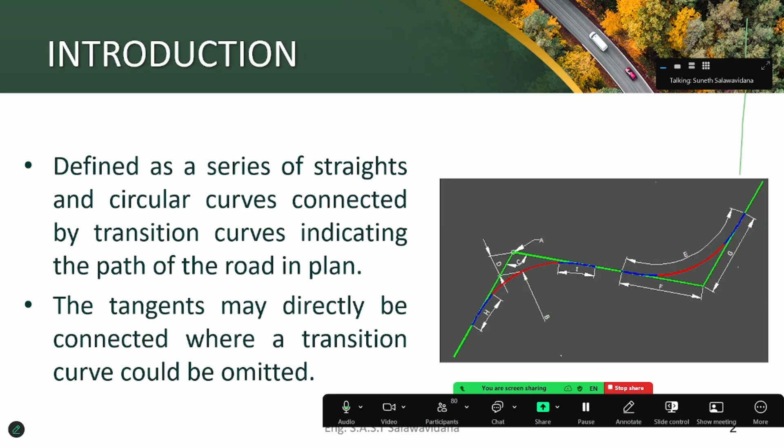But these are only necessary for high speed environments like expressways. For national roads, we don't use the spirals. So the tangents may directly be connected where a transition curve could be omitted, right?

Now when we are going to do a horizontal design, what are our major considerations? Number one is safety. Profile means a vertical alignment. How you are going to do that vertically.

Type of facility - that means the same design standards that you use for a national highway, you are not going to use for a rural road. And the design concept that you use for a 4-lane road, you are not going to use for 2-lane roads. Then the design speed, that is the most important one.

What is the design speed of Sri Lankan national roads? There are two design speeds. What are they? One is 50, the other is 70. 50 is for urban areas and 70 is for rural areas.

How do you know what is urban and what is rural? Just looking at a place and seeing this is an urban landscape - so this is urban, I have to go by 50 kmph. And then you travel and see paddy fields and things, and say okay this is a rural area, I'll go by 70. No, that is not the way.

Now usually the urban areas in this country are gazetted, and you have to refer to the gazette to check what is a rural area and what is an urban area, right? But when you are driving, you don't take the gazette with you. Therefore it is the responsibility of the road agency to put the speed limit. They have to put a signboard saying this is the speed here, either 50 or 70.

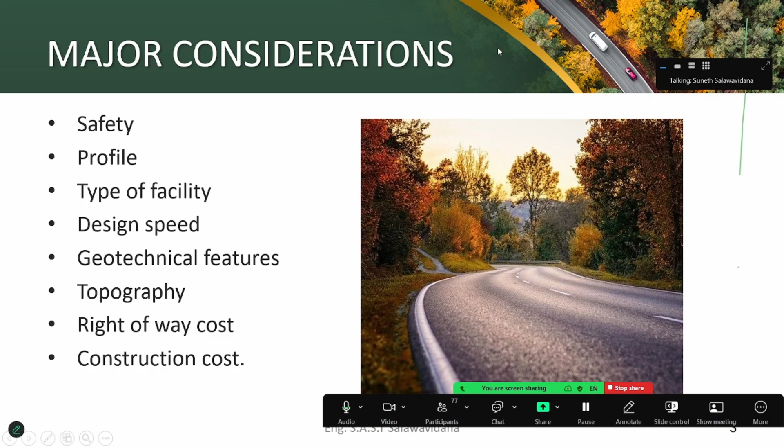So then we have to go into curve design, right? Curve design - I will tell you this one because it's very important, right?

You have to consider some theory stuff here. Maybe in university you studied movement of a vehicle along a circular path. When you are traveling along a curve, what will happen?

You understand that there is an outward force called centrifugal force. If you don't understand this, think back to childhood, when technology hadn't taken over. In our childhood we didn't have the internet, so we had our own games. One game was taking a ball, tying a string around it, holding the other end, and rotating it around your head.

Once you rotate this ball around your head, what happens? The ball is trying to go away from you. That is just because of the centrifugal force. Then why doesn't the ball go away? Because there is a string and there is tension, so there is an equilibrium of forces. Therefore the ball does not fly away.

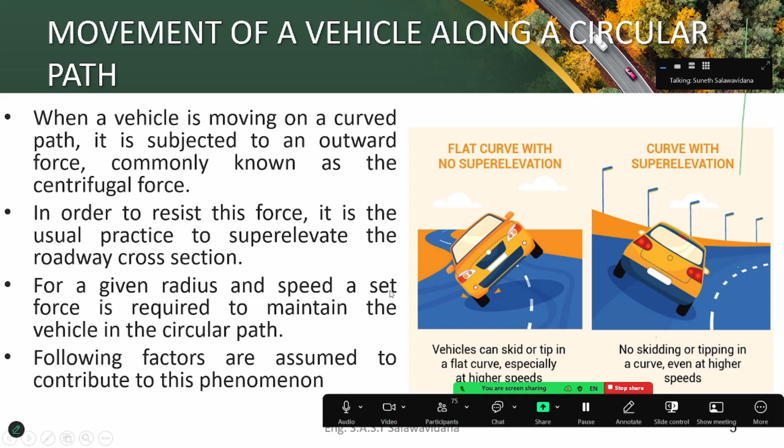So what are the factors? With this, we can prove an equation: R is radius, V is speed, E is the super elevation as a percentage, and F is the friction factor. F equals mu r, where mu is the friction factor, but here we use it as F.

With this equation, you can prove it using general physics - in my book I have proven this. So with this, you know what should be the minimum radius that has to be provided for a given speed and a given super elevation. Friction is usually the same; it can change depending on speed, but for a given speed the friction factor is the same. Therefore you can find the radius.

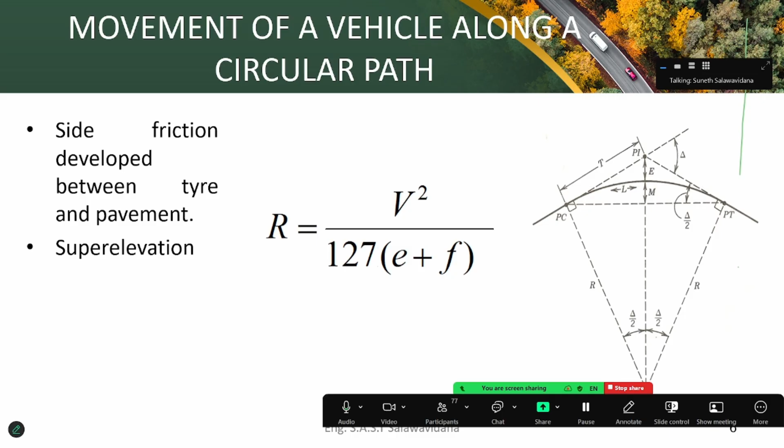Now you know how to get the radius for a particular design speed based on the super elevation. Super elevation is usually given as 2.5%, 3%, 4%, 5%, 6%, and so on. So if somebody asks, say the design speed is 50 kmph and the allowable super elevation is 3%, what should be the minimum radius to provide? That's an exam question if you are following highway design. You can find it using this equation.

The side friction factor, F equals mu r, where mu is the side friction factor, depends on vehicle speed, type and condition of the road surface, and type and condition of the tires. So once I say type and condition of tires, you might wonder how we find the friction factors, since tires differ from one vehicle to another.

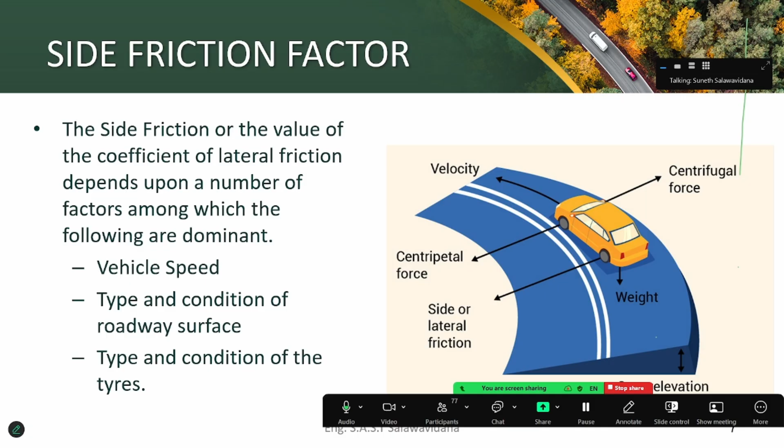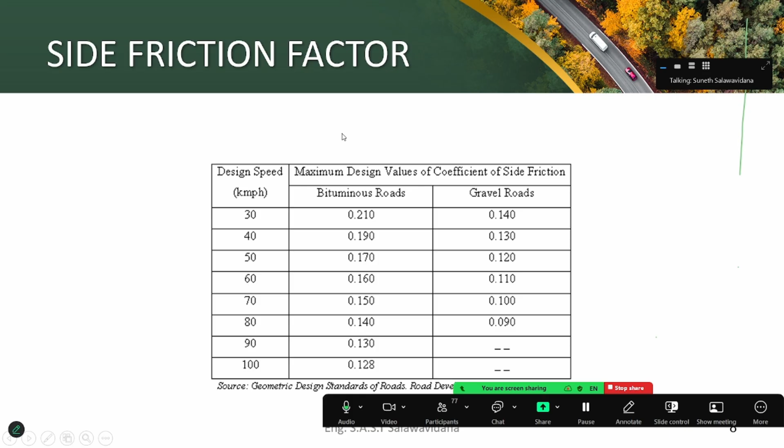But there are usually some standards for tires. With these particular standards, through research we can find what the friction factor should be. So these are the friction factors that we have calculated using those equations.

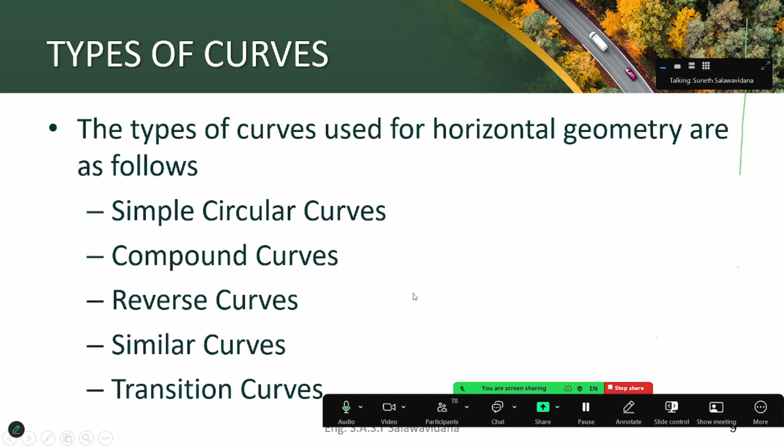Then we will go into the types of curves used in highways. There are a few: simple circular curves, compound curves, reverse curves, similar curves, and transition curves.

What are the general considerations of horizontal alignment? Alignment should be maintained as directional as feasible. What is this? Just think that it is the year 1815.

Just the time the British conquered us. Now they ask you to build a road to Kandy from Colombo. How do you do it?

You start from Colombo, go to Galle, then come to Ratnapura, then go to say Ampara, then come back to Polonnaruwa, and then come back to Kandy. Is that the way? No, you should try to have a road from Colombo to Kandy in a directional way. That means you always have to keep in mind that I am going in this direction. You can have some curves, and sometimes you'll have to come back and go, but still it should be directional.

Then you have to consider the topography. If there is a big mountain, what are you going to do? You go and cut it down. But if there is another way to go, don't do that, right? Or else what you do is put a tunnel.

Now in the Ruwanpura Expressway, we are going to have a tunnel. Earlier we tried to cut the mountain, but geologists from University of Peradeniya came and did some research, and they said you can't cut the mountains because they are very fragile. If you cut it, there will be earth slips. So then we proposed a tunnel. But why did we propose the tunnel? Because it was an expressway, so you can't go in a zigzag manner - you have to be very directional. Therefore we proposed a tunnel. That's after Ingiriya, so I don't know when they will build it.

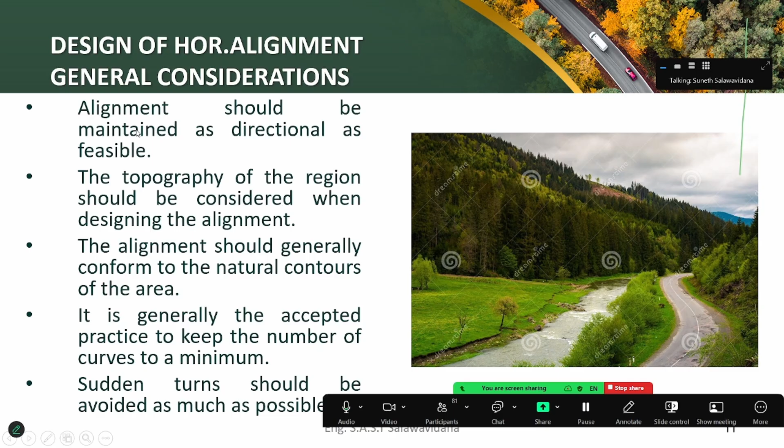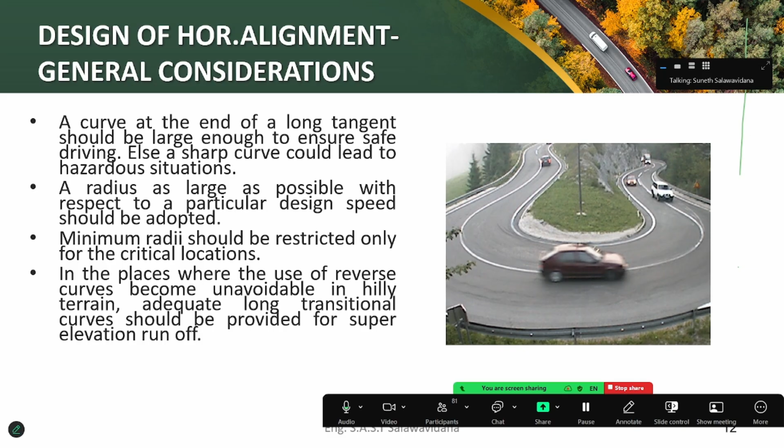Then, curve at the end of a long tangent - that means there is a straight section, and then don't put a very small curve. You have to provide radii as large as possible, and minimum radii should be restricted only for critical locations. The reverse curve I will tell you later.

When it comes to simple circular curves, they have to have a minimum radius for superelevation development requirement. What is superelevation development? If you consider a normal road, your superelevation is minus 2.5 - that is why they are slanted down. Just think somewhere you are going to use superelevation of 3% in one curve. Can you abruptly change minus 2.5 into 3%? Then there will be a step on the road. So you have to gradually change the superelevation from minus 2.5 to 3%. For that you need a particular length, usually 30, 45, or 60 meters, something like that. So you have to consider that when designing a curve.

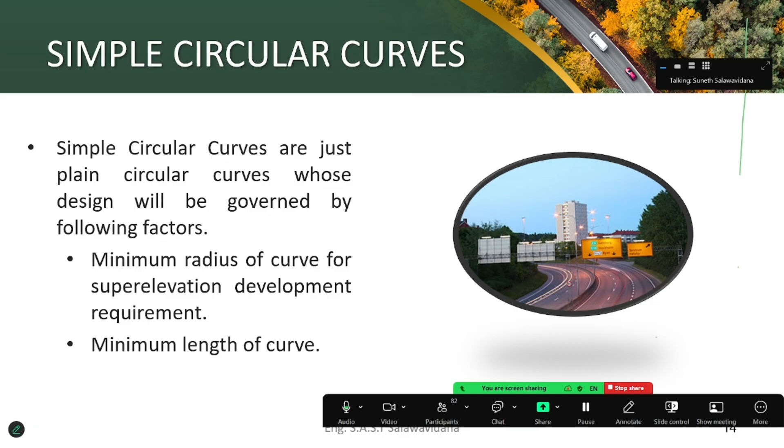Then, design speed of the curve should represent the speed below which most drivers operate. What does that mean? So you design a road, say for 30 kmph, but many drivers wish to drive there at 50 kmph. What about your design? It's a poor design.

This happened to us when we designed the Hatton-Nuwara Eliya Road. This road was designed by me and one consultant. Those days, before improvement, the design speed was 30. We had a massive investment and we developed it. After that, what was the design speed? Still 30. Why? Even though we widened the road, we could not improve the curve radii because it was heavily costly. Then again we had to go and put that 30 kmph signboard. The people were worried, even our RDA people were worried - my God, after this much investment, we haven't improved anything.

But it is not only the design speed that has to be improved. There is something called sight distance - how many meters you are going to see ahead of you. That is necessary for you to stop when there comes, not an accident, but some obstacle on the road. You should see ahead to stop, and you should see ahead to overtake a vehicle. These are things you have to think about.

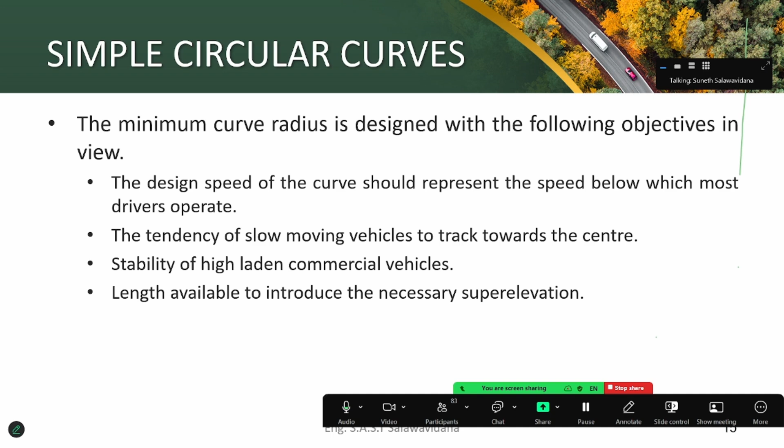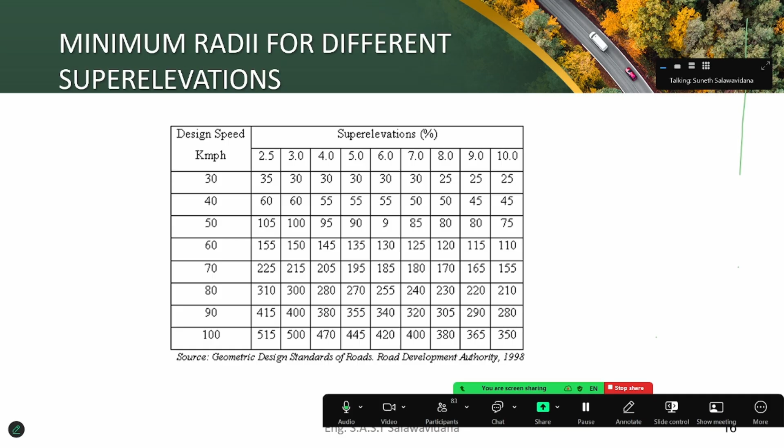Now, depending on the super elevation and depending on the design speed, these are the radii in meters that you have to employ. If you want, you can use the equation R equals V squared over 127 into (e plus f) and calculate, or else you can easily use this table.

So adverse crossfall means - what do you mean by adverse crossfall? What is this centrifugal force? That is mv squared over r. When r increases, what will happen? Centrifugal force is going to be less and less. When r is 100, it's going to be less. When r is 1000, it is going to be less. When r is 10,000, it's going to be negligible. So once it is negligible, friction itself can resist the centrifugal force.

So in those places, we call it adverse crossfall. There we don't super elevate. Instead, we put that crossfall as minus 2.5.

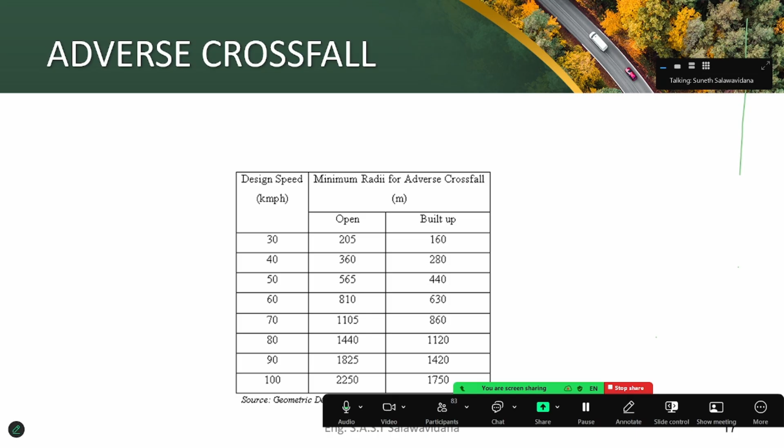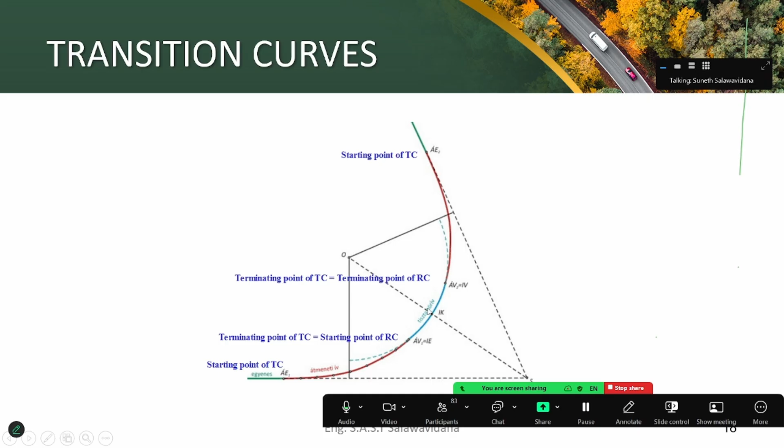The transition curves I discussed - that is the radius. It goes from some particular value, in the sense here it is infinity, to a particular value, and here from a particular value to infinity, like that. Okay, so I'm not going to read all these things.

But I will just tell you why we are going to put the transition curves. I think most of you have got your license. It is not like our days - in our days, most people got the driving license after passing out from the university. But these days things are different, so most of you may be driving vehicles.

So when you are driving a vehicle, when you are taking a turn, or when you are in a bend - we call it a curve in engineering, in general we call it a bend - do you suddenly take that turn? No. Even though you don't know it, unintentionally you are taking a kind of spiral path to enter into the curve, and you are doing it within the width of the lane.

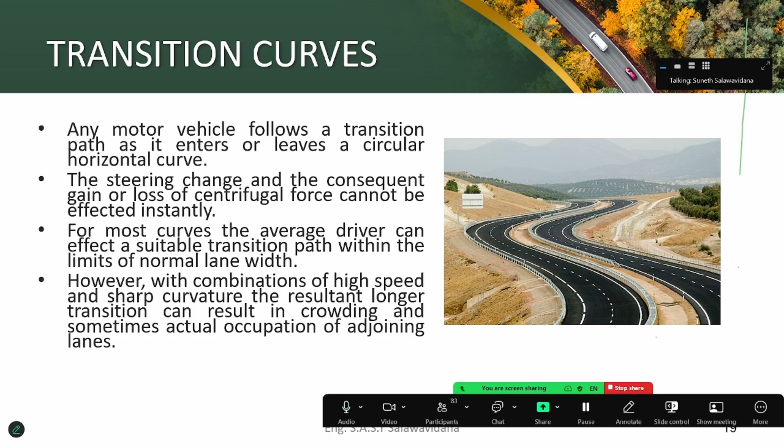But when the speeds are high and the curves are narrow, you will not be able to do this within the width of the lane. In that case, what will happen is you are going to occupy the opposing lane. To avoid that kind of thing, we are going to provide transition curves.

Then compound curves - compound curves are two curves in the same direction with different radii. But why are we going to do this? Why can't we connect PC and PT with one curve? We can, but if we do that, it will not go through this PCC point. So then you will ask me, why is it necessary to go through the PCC point? If there is no such requirement, of course you can have one curve. But if there is a requirement like that, then you may wonder why.

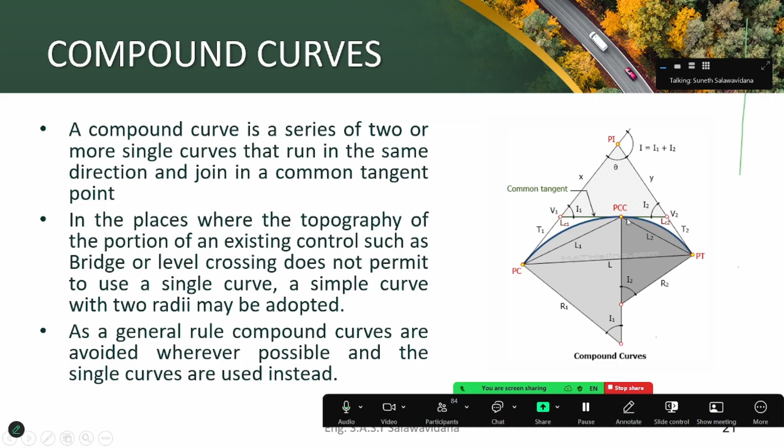Just think, at that PCC point there is a bridge. Can you demolish a bridge and then design another thing? No, you can't. One thing is, it is very costly to do that. The other thing is, we don't go on demolishing bridges for every road improvement. So if there is a point that you definitely have to go through, then you can use compound curves. Then reverse curves are curves having different, opposite directions, like this.

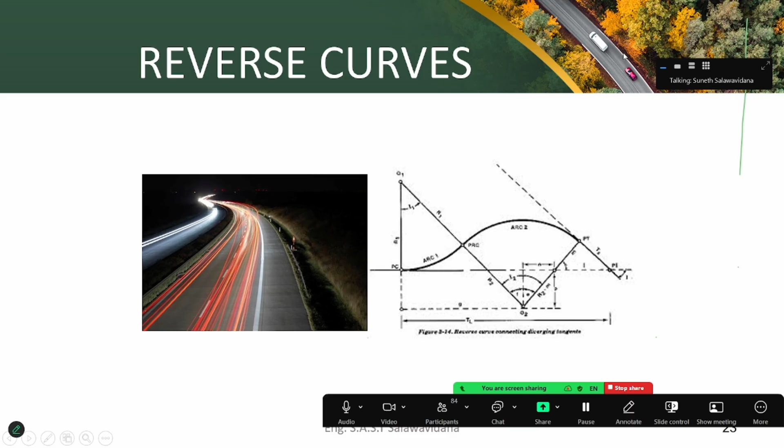Here is a super elevation development. This is the LHS side where super elevation is coming. This is the common point of a clockwise direction curve and an anti-clockwise direction curve. The super elevation comes down at the common tangent point, becomes 0, and then goes down. On the RHS side, it starts like minus, then increases, and at the common tangent point it becomes 0 and then rises. So this kind of super elevation change is happening.

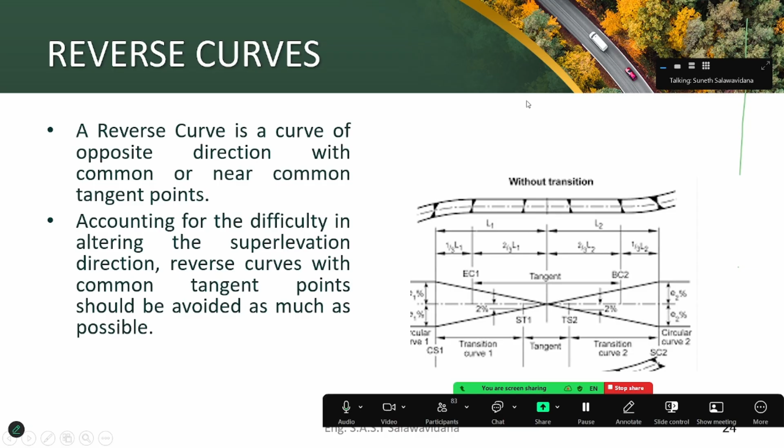Therefore these reverse curves are not very preferable, but if you can't avoid it, you will have to put it. Here you can see how they are located. Similar curves are two curves separated by a small tangent. These are also not very preferable.

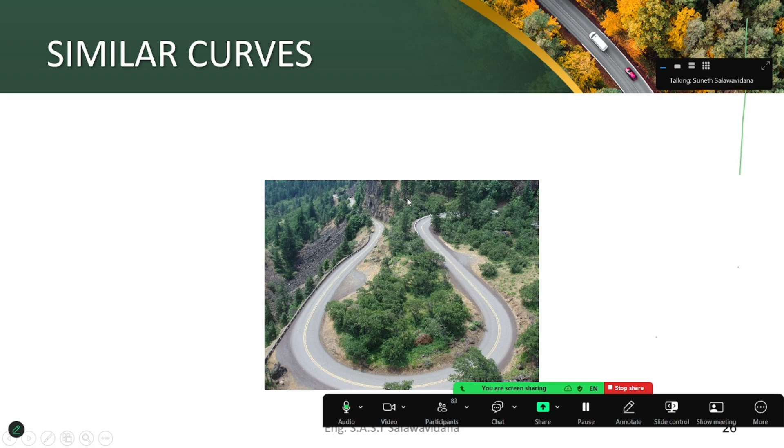Then widening, you may have seen this widening. What is the normal lane width? In Sri Lanka, we usually go for 3.5 meters, but due to the speed and narrowness of the road on a curve, if vehicles cannot turn within the lane width, especially heavy vehicles, they are unable to take the turn within the lane width.

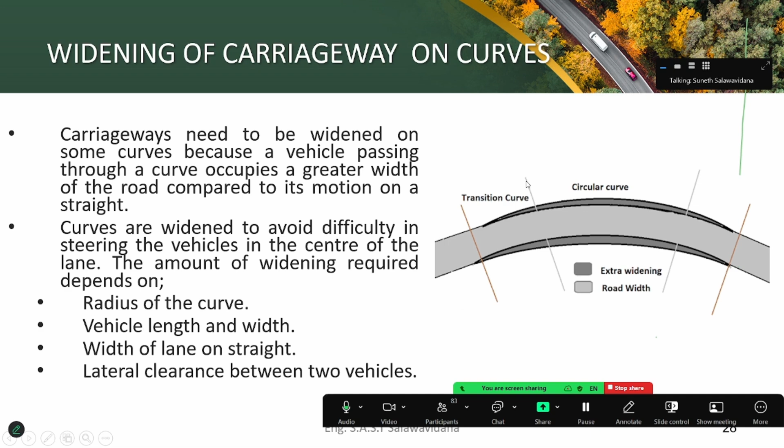This is very much visible on the road from Avissawella to Ginigathena. Heavy vehicles coming along end up occupying the other lane, the opposing lane. To avoid that, we provide some additional widening. This is what we call widening of carriageway on curves. This is also there from Balangoda to Haputale, you can see these things.

Right, so that is the end of my first part. So we'll go to the second part.

I think you can see my screen now. Now I told you there are two parts, what are they? You can't see? No sir, it's not visible. Sure, I'll share, give me a second. Now is it visible? Yeah, now we can see. Okay, thank you.

Now, as I told you before coming here, there are two projections. One is the horizontal alignment, the other one is the vertical alignment. We already know something about the horizontal alignment. Now the vertical alignment is here. This is how we design a road.

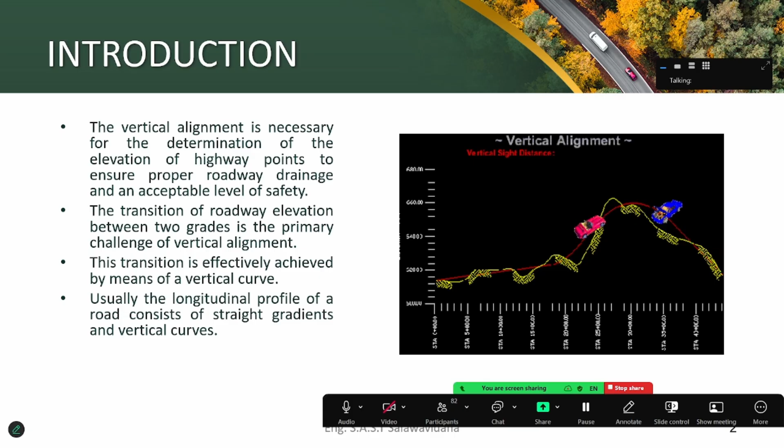Now there are two types. Can you see here? This one we call a crest curve, just as the English word. Crest curve. This one we call the sag curve.

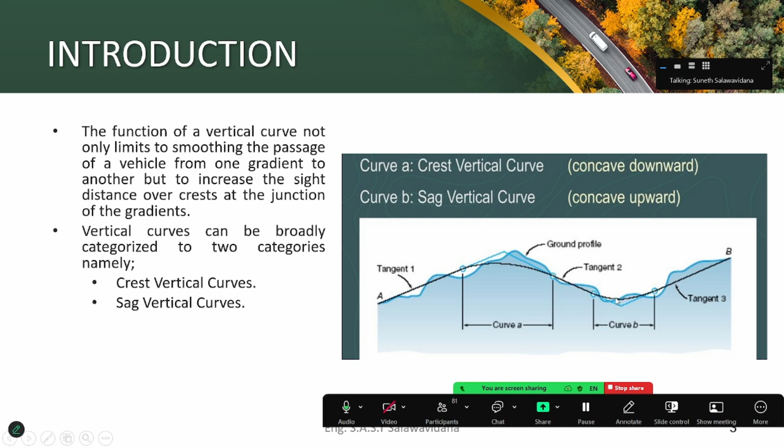So what are the general considerations? The following general controls for vertical alignment should be kept in view when designing the vertical profile of a road. The selected grade line shall be smooth with gradual changes, meaning you should not have abrupt or steep slopes. They should be consistent with the class of the road and terrain type.

Two vertical curves in the same direction separated by a short section of tangent grade should generally be avoided. We usually call them roller coasters. Have you seen roller coasters? In Sri Lanka we don't have many, maybe in Leisure World you have one, I don't know any other place. But if you go to Singapore or Korea, they have very nice roller coasters. A roller coaster means you come down, there is a sag, then you go up, there is a crest, and then you go down again into another sag.

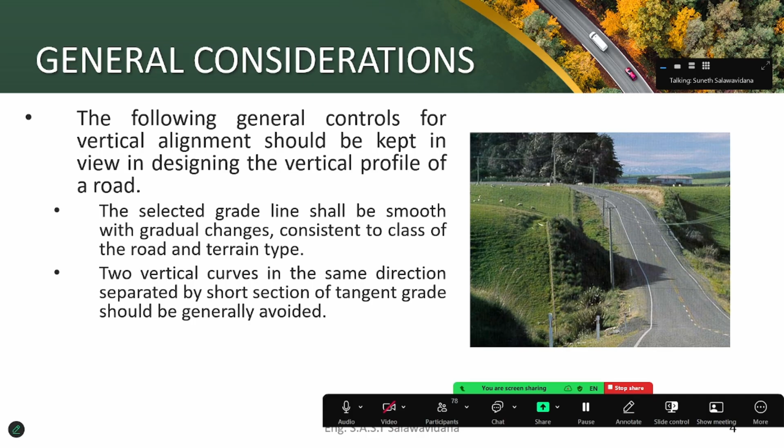So that is better for a roller coaster. Why? We go to a roller coaster to get some thrilling adventure. Now, do we travel on the road to get a thrilling adventure? No. Therefore, we should not design roads like that.

Then usually on long grades, it may be preferable to place the steepest grade at the bottom. That means you start with the maximum grade, usually 6% on a national road. So you start with 6%, then you try to reduce it to 5%, 4%, 3%, and at the top it should be flat. But don't do it the other way, starting from 1%, then going to 2%, then 3% — that is not going to work, it is not very good.

Because we have to consider the braking distance and all these things. They are here - a hidden type of profile. Now, can you see this one? Hidden type: when you are going this way, you don't see this profile. So these are bad designs.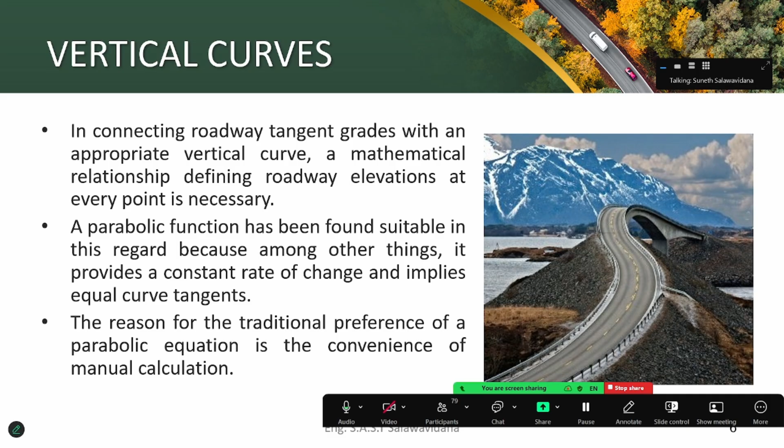In the same way, you are having a horizontal curve also. Horizontal curve and vertical curve should not be put in the same place. That is not a very good design.

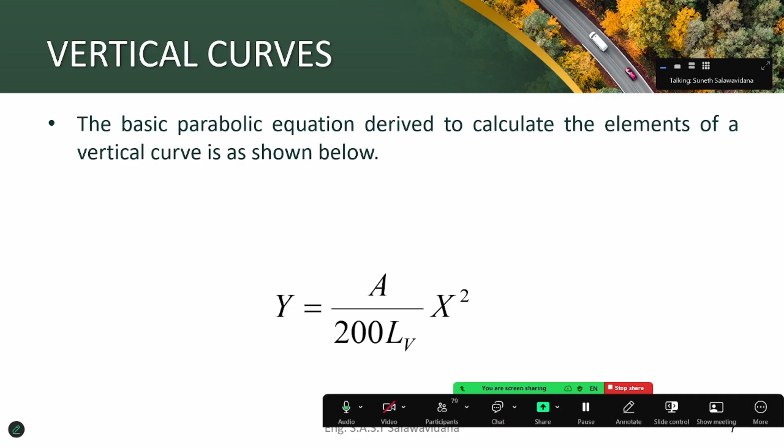So this is the vertical curve equation: Y equals A over 200 LV, x squared. A is the difference of gradients - if one gradient is 3% and the other gradient is 4%, it is 3 minus 4 and the modulus of it. And L is the curve length. So this is the parabolic curve. There are two types.

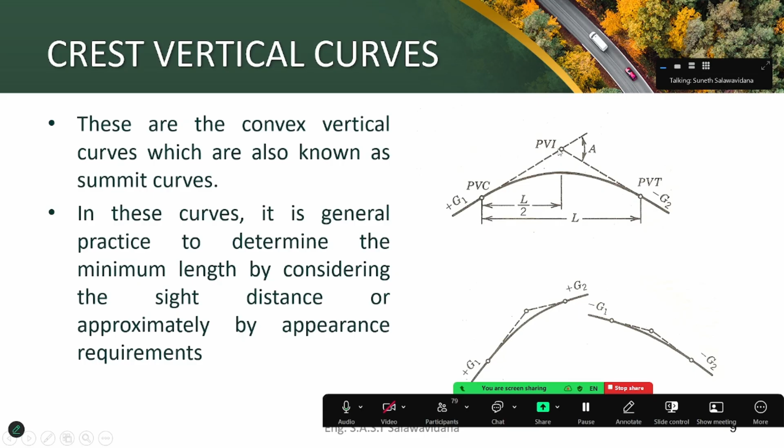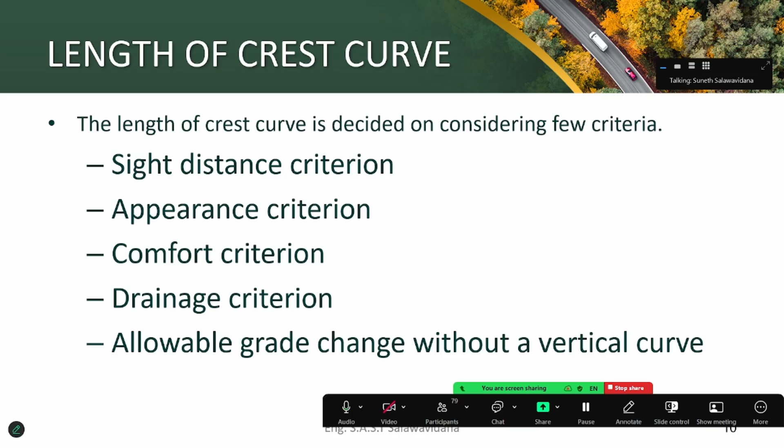These are crest vertical curves, right? This type of curve is called a crest vertical curve or summit curve. These are convex, right? Then how are we going to design a crest curve? There are few criteria: sight distance, appearance, comfort, drainage, and allowable grade change without a vertical curve.

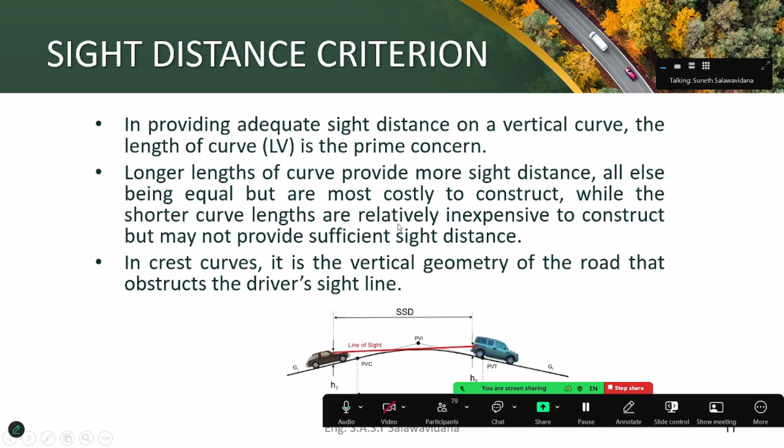So let's discuss them. Sight distance means when you are going this way, there should be a line of sight. If you flatten the curve, this line of sight is going to be very high. If you make it narrow like this, then what will happen? This line of sight is going to be less. So there are some particular values that you have to keep when you design it, right?

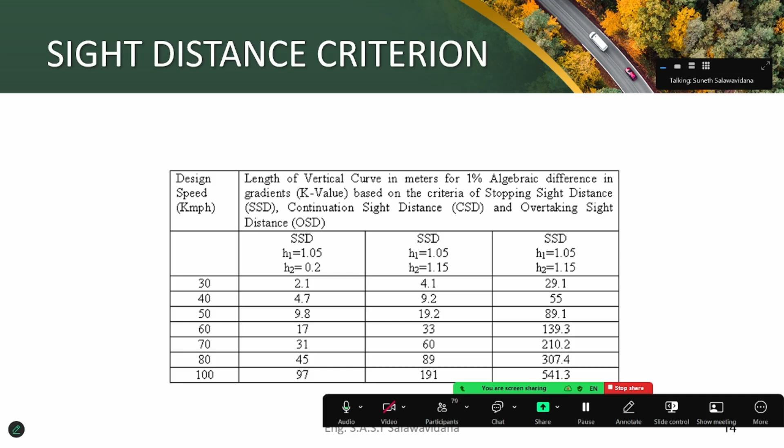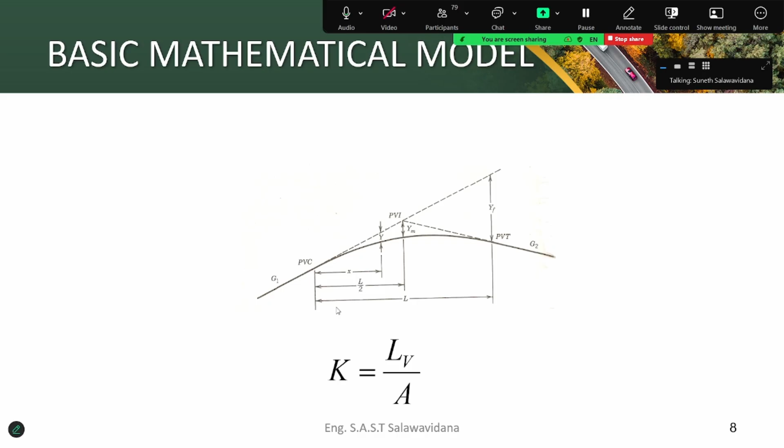These are some equations I am not going to discuss, but of course there are some K values. K value is LV over A. LV is the length, A is the gradient difference. So these are the K values that they have given.

So if your design speed is 50, if you have to give stopping sight distance, it should be 9.8, right? Let me explain what is stopping sight distance, continuation sight distance, and overtaking sight distance. Stopping sight distance is: if you are traveling on a road and you see an obstacle, there should be a particular length for you to stop safely without hitting that object. That stopping sight distance should be maintained throughout the road. Otherwise, it's a very risky road.

Then the overtaking sight distance is - just think there is one crawling vehicle going in front of you and you are trying to overtake, occupying the opposite lane. These are only for two-lane roads, right? If the road is segregated or separated, then you need not have overtaking sight distance.

Now, the overtaking sight distance: you are trailing behind the slow moving vehicle, then you take your vehicle into the opposite lane, then you accelerate up to the design speed, right, and then you come back to the left lane. For that you want a sight distance of some length - that is called the overtaking sight distance.

Continuation sight distance means - just think, by hook or crook, now you are in the opposite lane. After that, how many meters do you want to continue your maneuver, right? That is called the continuation sight distance.

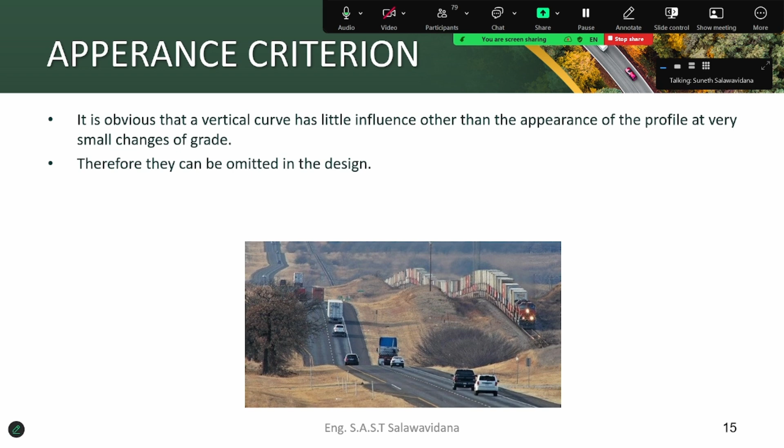Then appearance: the vertical curve has little influence other than the appearance of the profile at very small changes of grade. Say if it is a 3.1 gradient and a 3.2 gradient, that is a very small gradient difference. Then due to comfort and appearance, we are going to have a curve. These are these values.

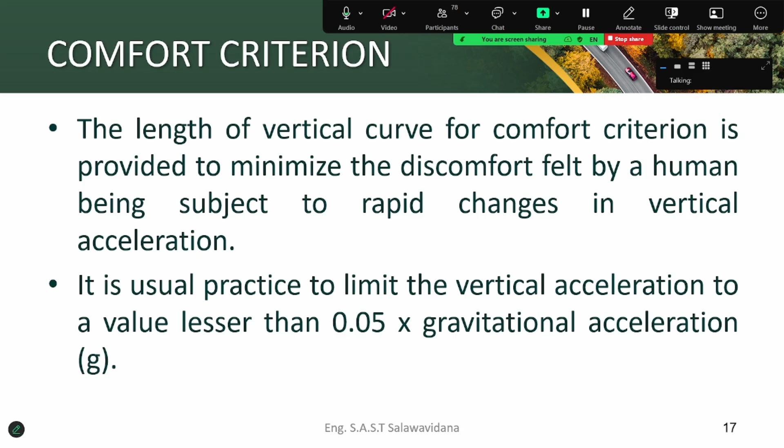Then the comfort criterion - there should be comfort. If you are going to have some narrow curves, it is not going to be very comfortable, right? So for that also you are going to have some values. Say if your design speed is 50, you have to have minimum K value 6.5 to ensure the comfort criteria. But remember, you have to provide 9.8 for the sight distance, and sight distance has to be maintained throughout.

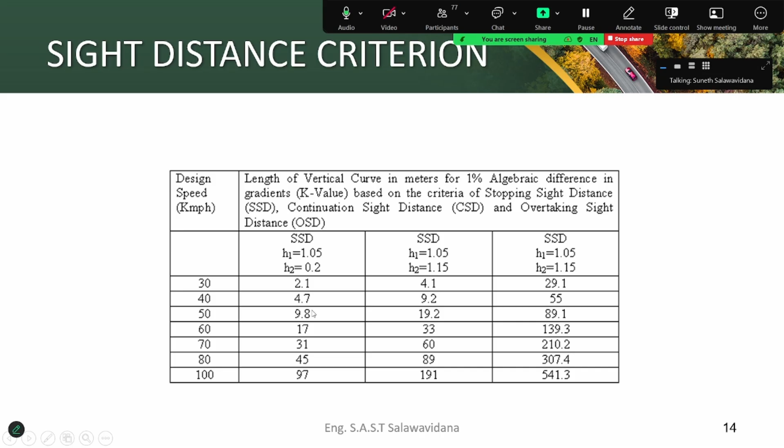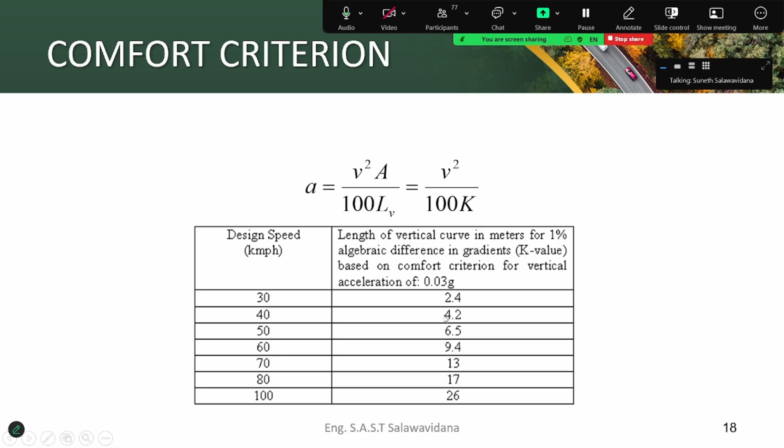Here it says 6.5. So once you provide 9.8, the 6.5 is already satisfied.

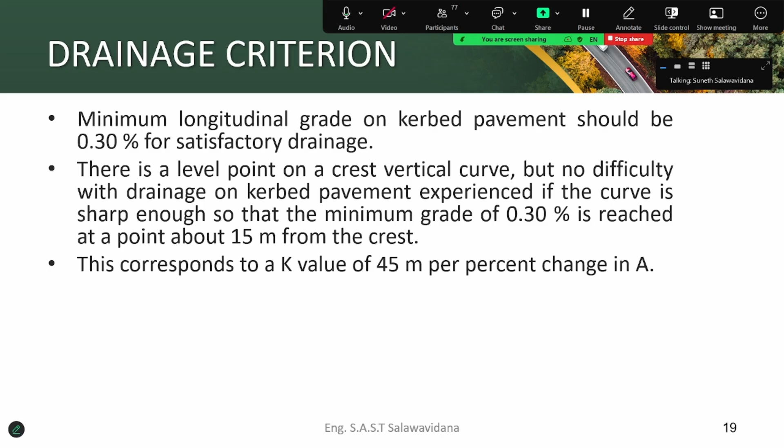Then the drainage criterion - drainage, of course, you have to keep minimum 0.3 gradient for drainage.

Then we'll discuss a little bit about sag vertical curves. It is just the same curve but in the other direction. Do you have to consider sight distance here? No, why? It is already visible. But you have to consider comfort related vertical acceleration, appearance, drainage, headlight performance, or overhead restriction to the line of sight. What is this headlight performance? We'll discuss.

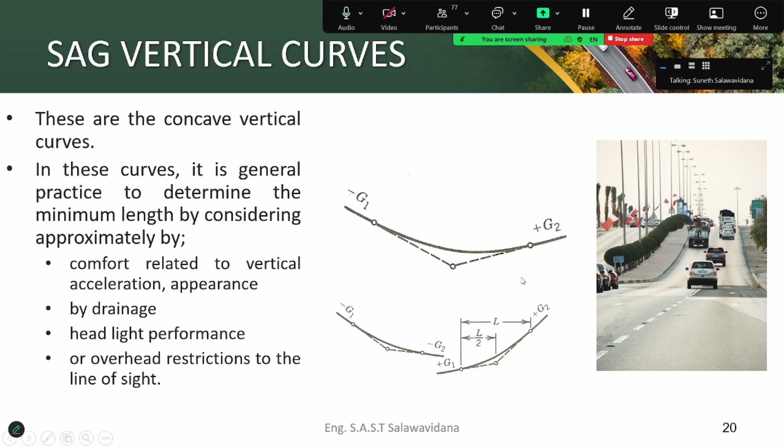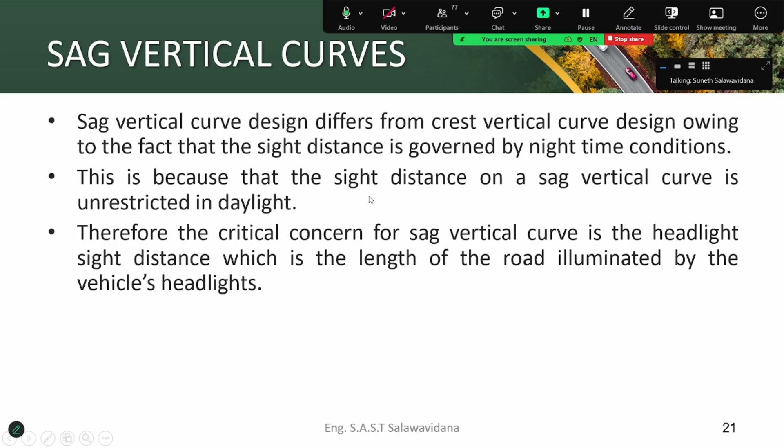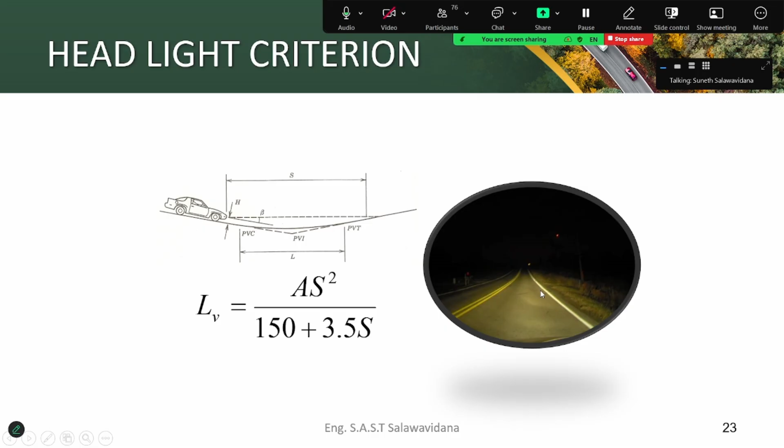This is because the sight distance on the sag vertical curve is unrestricted in daylight, but depending on the headlight, you have to provide the minimum sight distance. So here also you have to give the minimum values. If it is 50, you have to provide minimum K value of 12, otherwise the headlight criterion is not going to be satisfied.

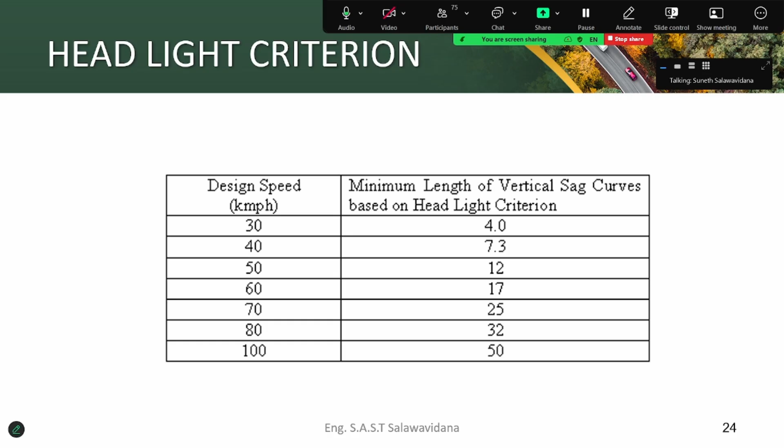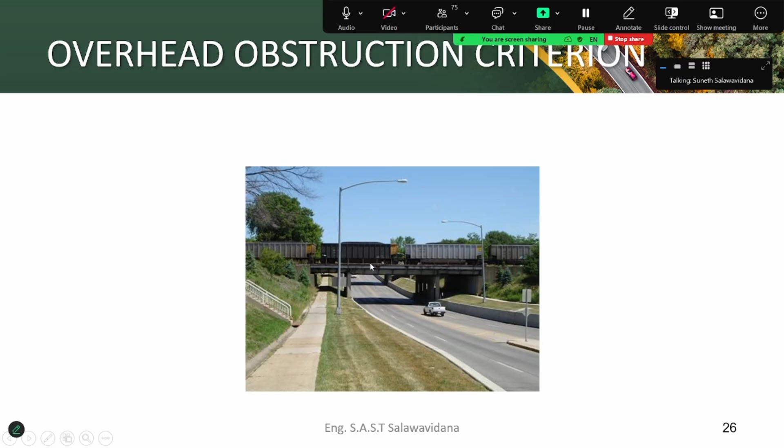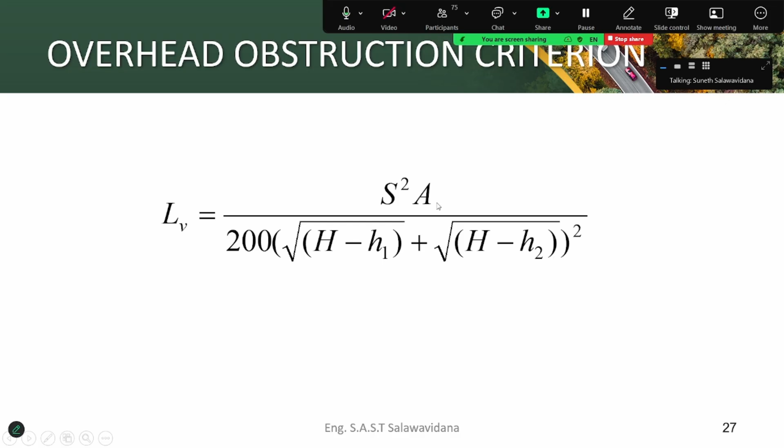Then overhead obstruction - have you seen this kind of thing? If there is an overhead obstruction, this is the sight distance... this is the curve length that you have to provide to avoid the overhead obstruction criterion. Other criteria - appearance, comfort, and drainage - are the same as the crest vertical curve.

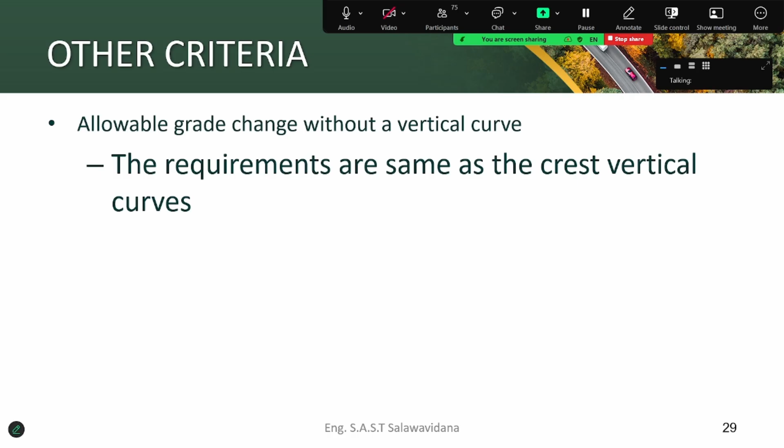Allowable grade change without a vertical curve - what does that mean? So I told you, right? If it is a very small grade change, say 3% gradient one and 3% gradient two, they are going to be connected together, and you are going to provide some curve. Maybe you need not have a curve if that gradient difference is very small.

Then we'll discuss a little bit about grades. Grades are the slopes, the gradients that you are having in the road.

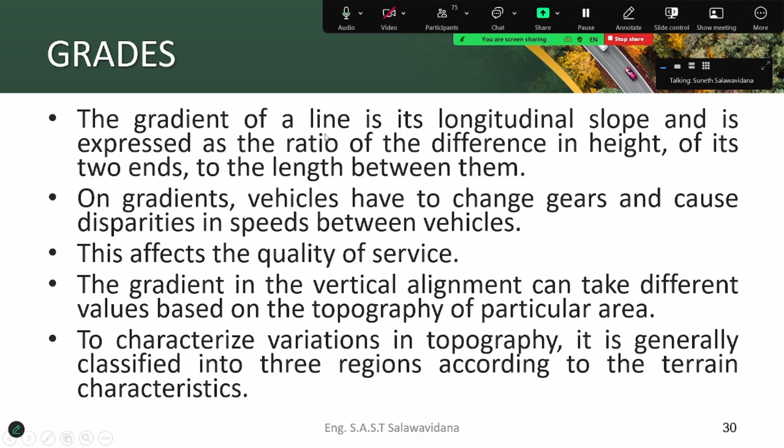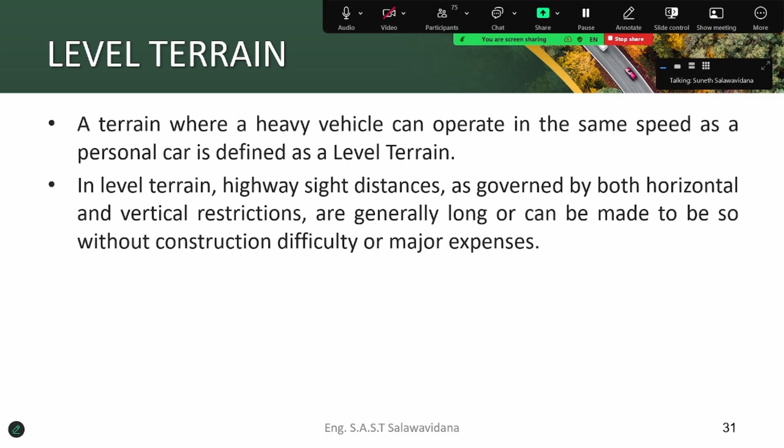There are three types of terrains. One is level terrain. If you are not very familiar with this, I'll give you an example. I think most of you have gone from Colombo to Kandy, right? If you want to consider level terrain, think from Colombo to say Warakapola - it is level terrain, right?

And then we have rolling terrain. Rolling terrain means you have mountains and sometimes you have flat roads. Just think if you start from Ambepussa to Kegalle - there it is rolling terrain. Sometimes it is gradients, sometimes it is flat.

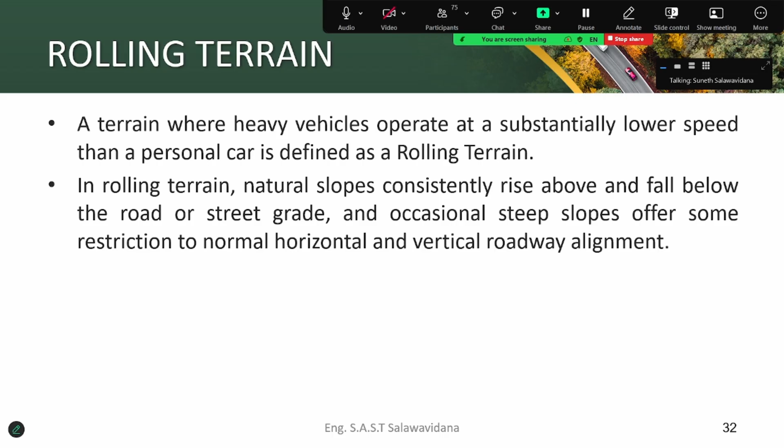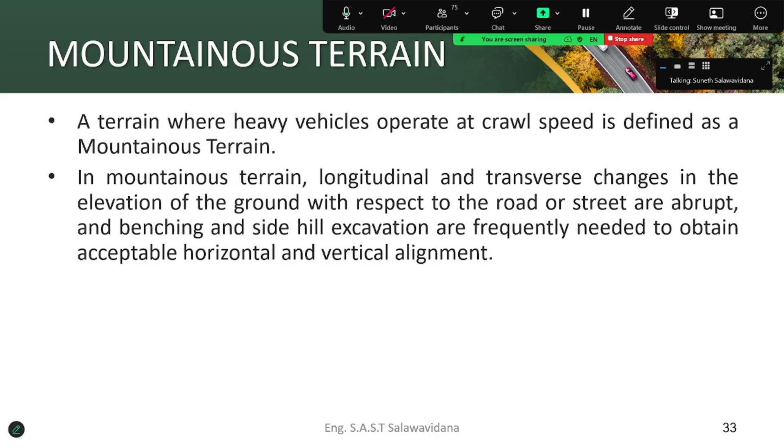Right, the mountainous terrain - of course you can think about Kadugannawa. A terrain where heavy vehicles operate at crawl speed. You might have seen, right?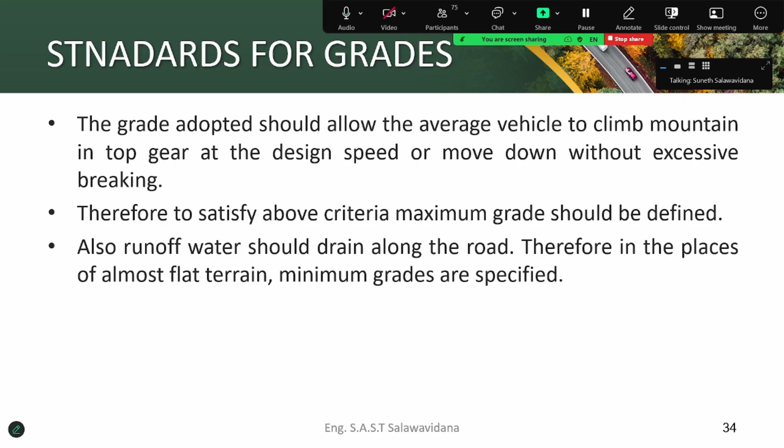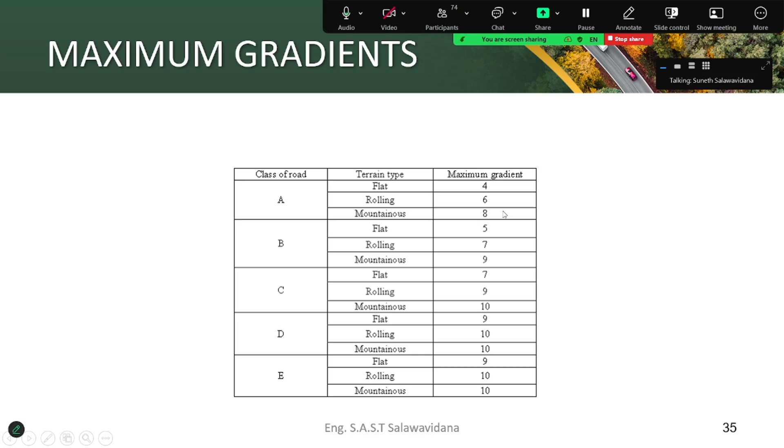These are some standards for grades. How are you going to provide here? These are the maximum gradients. If it is a class A road, say Colombo-Kandy road, then in flat terrain you have to provide maximum 4%. Rolling should be maximum 6%. Mountainous should be maximum 8%. If you provide more than that, your design is substandard.

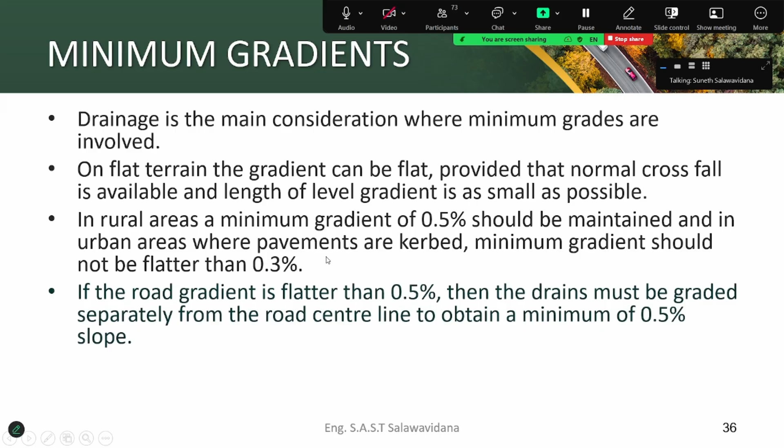Right, then there is minimum gradient also. Minimum 0.3 you have to provide. In rural areas it is 0.5, and in urban areas it should be 0.3.

Then grade steeper than general maximum - it is something like that. Say I am telling you, if it is a national road, you have to provide 8% gradient, but sometimes you will have to provide 10%.

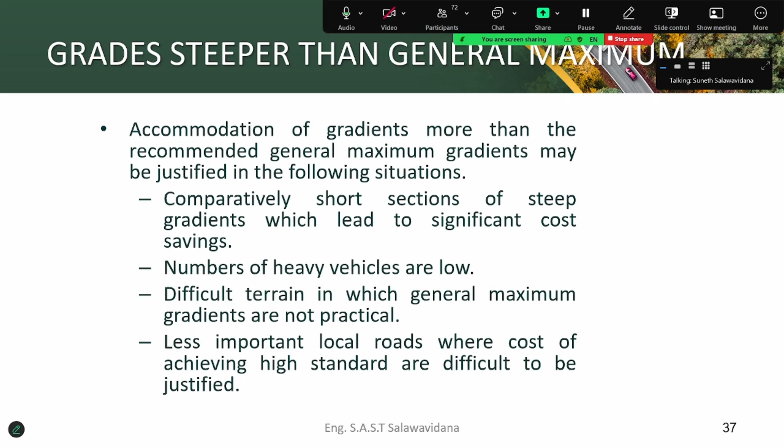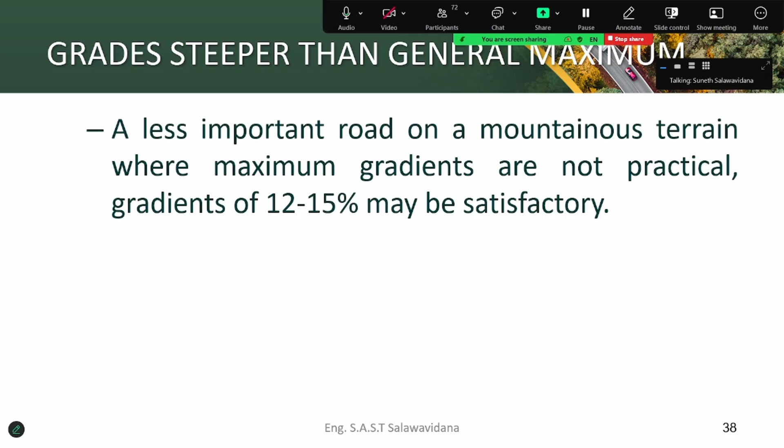Then there are some distances that you can go with these gradients. On a less important road in mountainous terrain where maximum gradients are not practical, gradients of 12 to 15 may be satisfactory. Okay, so that is the end of our lecture.

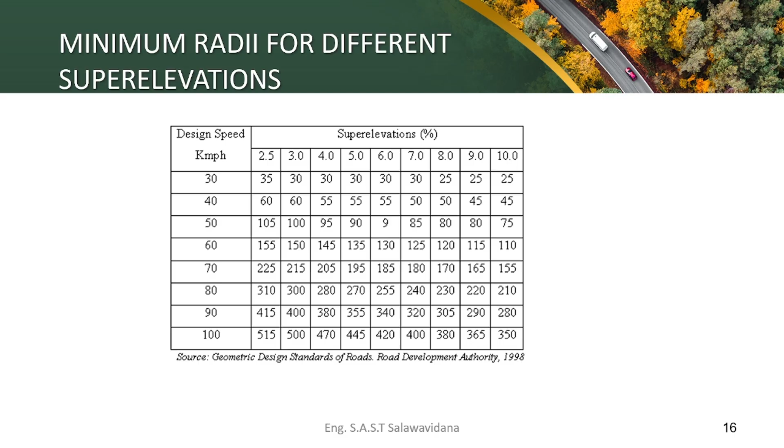Now, can you see this table? I think you can see this table, right? No, we can't. So maybe I will have to share again. Right, okay, I think now can you see? Yes, sir, now we can see. Just see here.

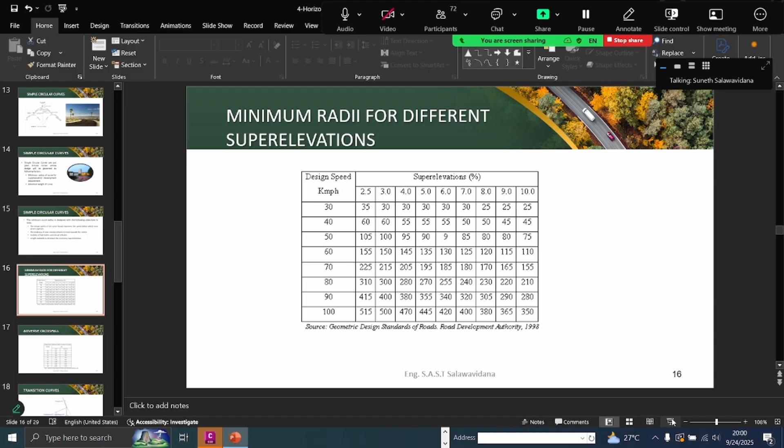If you consider a design speed of 50, if your super elevation is 2.5, 105 is the minimum curve radius you can use, right? If your design speed is 50 and you selected 3% super elevation, the minimum curve radius is 100. So if you're asking what is the minimum radius that can go on national roads, usually our national roads are designed for 50 kmph, so probably the minimum radius should be say 90 or something, because even though there are values, we don't go beyond that.

But in places where you cannot design for 50, sometimes we have gone for 30 kmph in some extreme locations. There, as the minimum design radius, we go for 30 meters - 30 design speed, 30 radius. So with 30 radius, we can go with 3% super elevation. Is that the question you asked me?

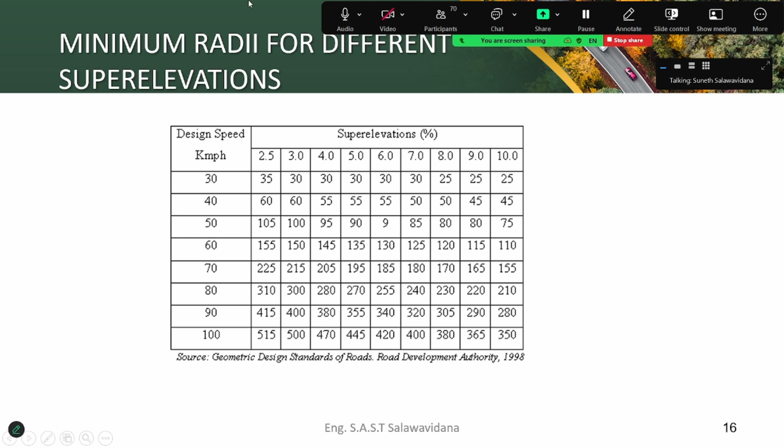Yes, sir, yes, yeah. Okay, any other questions?

I'm Hirush from KDU. Am I audible? Yeah, sure. So are there any specific design guidelines for center medians and sidewalks?

Yeah, for center medians and sidewalks, for pedestrians. Yes, now of course, when it comes to Sri Lanka, we are using Austroads standards, right? Austroads means Australian road standards.

Now, in Australian road standards, they have a series of books - the Austroads book series - for center medians and the pedestrian footpath also. There is a particular book, I think it is road furniture or something, but if you just go to this Austroads book series, you can find it. So there is a book for roundabouts, signal design, and the geometric designs of roads, and for road infrastructure, sorry, road furniture - that is for the lane marking, and then the pedestrian crossings, and then the center medians.

And pedestrian walkways, and all these things are available. And the other thing is, if you refer to the AASHTO green book also, all these things are there. But in Sri Lanka, what we do is we don't have such a book.

Yes, sir. Thank you, sir. Okay, any other questions? Sir, yes.

Well, now regarding these bicycle lanes, I did a research about bicycle usability back in 2014. This research has been cited by many others who are doing research on bicycle lanes. The problem with bicycle lanes is, of course, it is very difficult to get our people to ride bicycles.

That's one thing. Why? Because Sri Lanka is a kind of hot country, it is not like Europe or USA or Australia. So when it is hot, people usually try to go by a covered vehicle, and there's also the dust and the rains. So there is a problem of how we are going to promote bicyclists.

That's one thing. But in most of our roads, it is not only the bicycle lane, it is bicycle lane combined with hard shoulder. Why have we given a hard shoulder? If there is no hard shoulder, drivers don't get a perceived sense of safety. There is something commonly called curb friction. If there is a curb, even though there is enough space, they feel restricted, so they cannot entertain the given design speed.

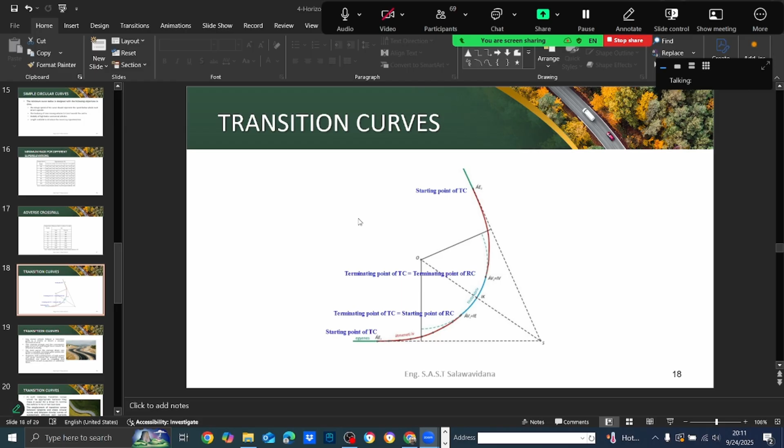Hello? Hello, yes. Yes, we can hear you. Yes, I think somebody spoke, but now, no. Okay, any other questions that you have?